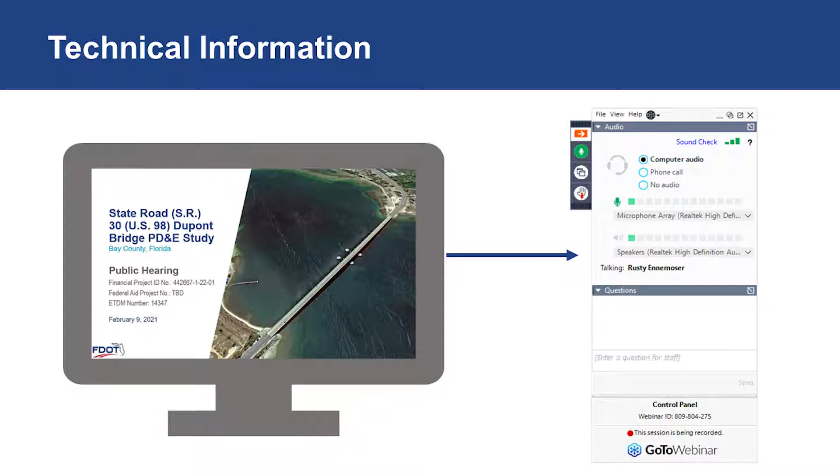All virtual and phone-in attendees will be placed in listen-only mode throughout the public hearing. At a later date, we will provide responses to written comments that were submitted during online registration and those submitted at the in-person venue. The comment period begins as soon as the presentation has ended. Verbal comments from the in-person meeting will be addressed first. Verbal comment requests submitted during online registration will be addressed second.

Providing verbal comments using GoToWebinar is simple. First, you must request to speak when registering to attend. During the comment period, the organizer will call your name that you provided at registration and unmute you. If the microphone icon is green, you are ready to make your comment. If the microphone icon is orange, you will need to click the microphone icon once and it will notify you that you are unmuted, and then you can provide your comment. Again, you will not be on camera at any time if you join online.

During the public comment period after the formal presentation, in-person participants will be called upon to speak first, followed by the virtual online speakers who wish to speak. If you dialed into the public hearing by telephone, your phone was automatically placed in listen-only mode and will remain in listen-only mode throughout the public hearing.

A recording of the webinar will be available at the project website 3 days after the hearing. You can also call the project manager after the public hearing to request additional project information. Prior to the public hearing, draft engineering and environmental documents were made available for public review at Parker Public Library since January 19, 2021, and will continue to be available through February 19, 2021. The documents are also available on the project website. You may also view project documents tonight at the in-person public hearing.

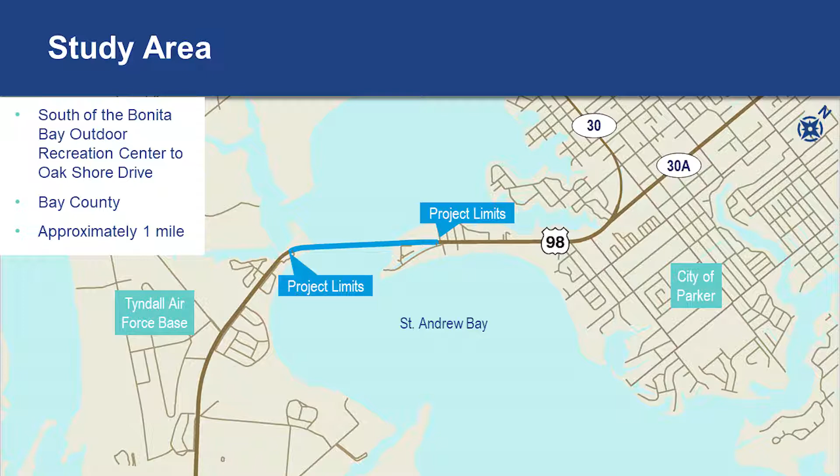The study limits extend from south of the Bonita Bay Outdoor Recreation Center to Oak Shore Drive, a distance of approximately 1 mile. The southern approach is located on Tyndall Air Force Base, and the northern approach is located within the city of Parker.

The project purpose is to identify the best solution and location for the replacement of the existing Dupont Bridge and to secure the necessary environmental and regulatory approvals.

The project is needed because the existing bridge is structurally deficient. It is also functionally obsolete, which means it does not meet current design standards. The existing bridge has a vertical clearance of 50 feet, but the current U.S. Coast Guard requires a minimum clearance of 65 feet. The existing bridge is also not ADA compliant and does not provide appropriate pedestrian and bicycle accommodations.

The project is consistent with local transportation plans, including the Bay County Transportation Planning Organization 2040 Long Range Transportation Plan, the Transportation Improvement Program, or TIP, the State TIP, or STIP, and other regional plans.

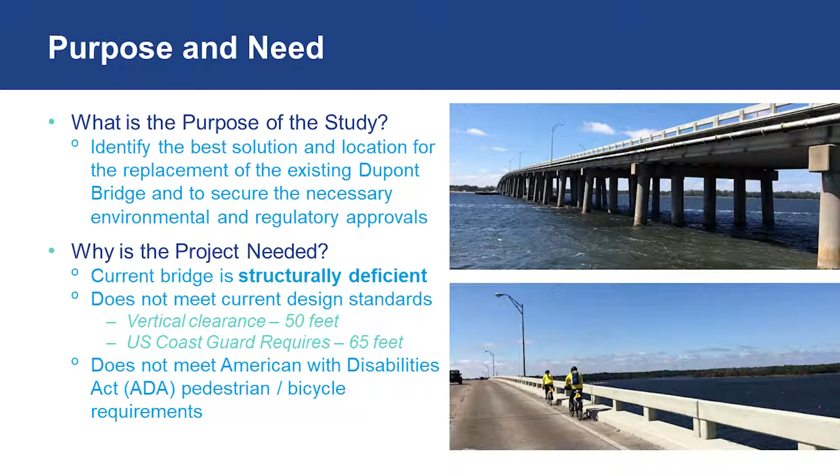3 build alternatives and a no-build alternative were evaluated as part of this PD&E study to meet the project purpose and need, as well as minimize impacts to the natural and built environment within the study area. The no-build alternative assumes no improvements are made and does not meet the purpose and need for the project. However, it does provide a baseline condition against which to compare and measure the effects of the build alternatives. A detailed comparison of the build alternatives is provided in the preliminary engineering report and the environmental document.

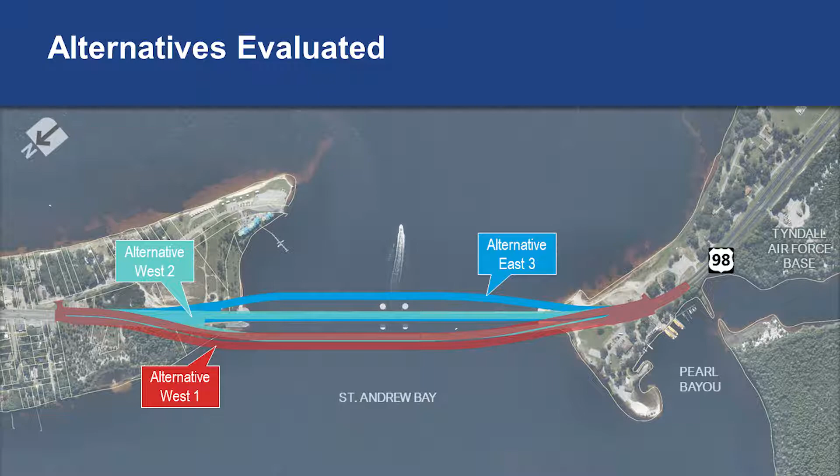Alternative West 1 places twin bridges west of the existing Dupont Bridge, which simplifies construction and avoids the 1920s bridge footprint and the current Dupont Bridge footprint.

Alternative West 2 places one of the twin bridges west of the existing Dupont Bridge. Temporarily, all traffic will be shifted to the new bridge while the existing bridge is demolished. Then, the second twin bridge will be constructed and traffic will open on both bridges. This alternative avoids the 1920s bridge footprint but will have pier conflicts with the current bridge.

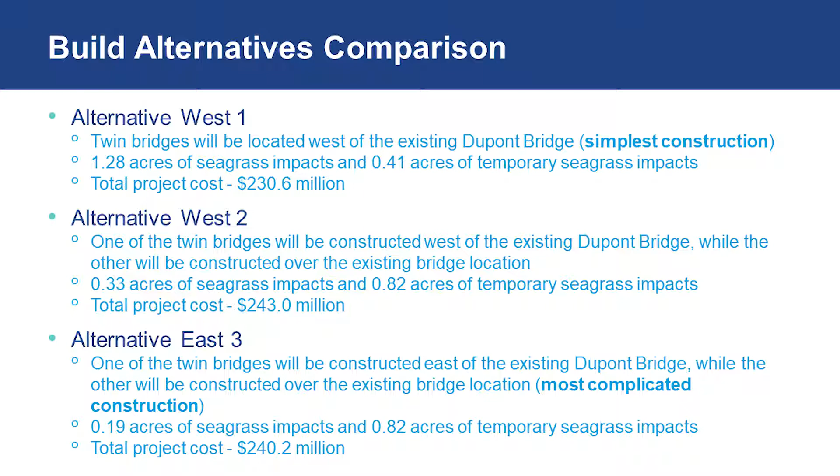Alternative East 3 constructs one of the twin bridges east of the existing Dupont Bridge, then shifts all traffic to the new bridge and demolishes and reconstructs the second twin bridge in place of the existing bridge. This alternative has conflicts with both the 1920s bridge and the current Dupont Bridge footprint.

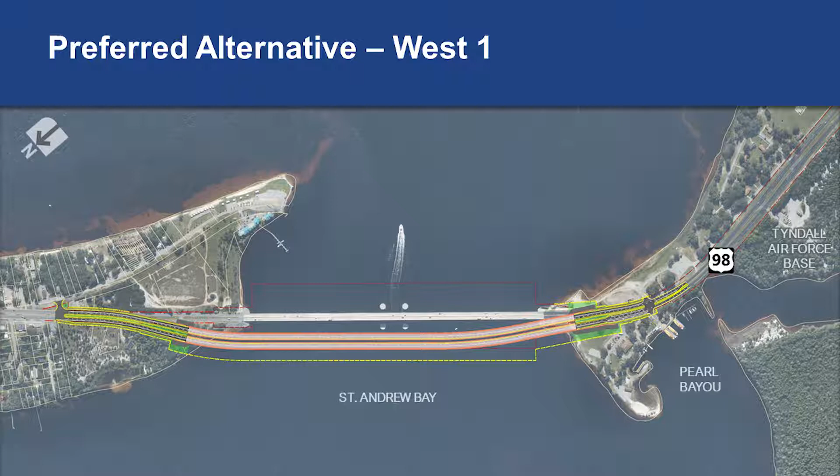With consideration of public input and an evaluation of engineering and environmental considerations, the preferred alternative is the West 1 alternative.

The proposed roadway typical section provides 2 travel lanes in each direction with space to add a future lane. The travel lanes have a 30-foot separation, including 6.5-foot inside shoulders and a 17-foot median with curb and gutter. A 6.5-foot buffered bicycle lane is adjacent to each outside lane, separated from the 6-foot sidewalk by curb and gutter and an 8-foot grass strip. The design speed of the proposed roadway typical section is 50 miles per hour.

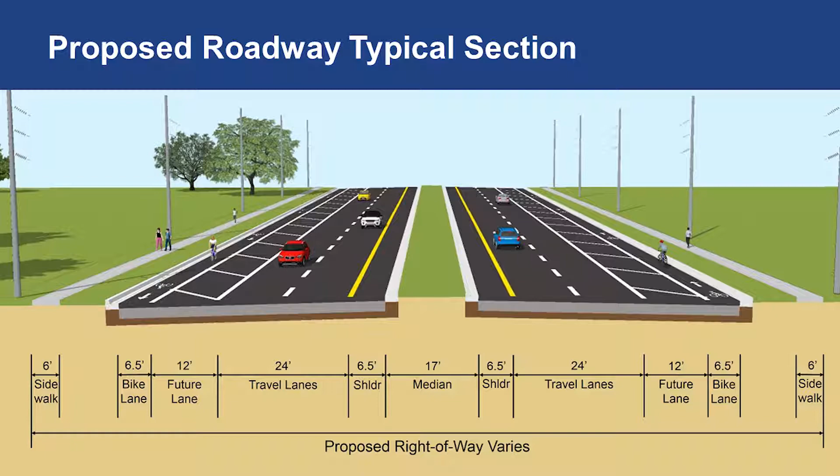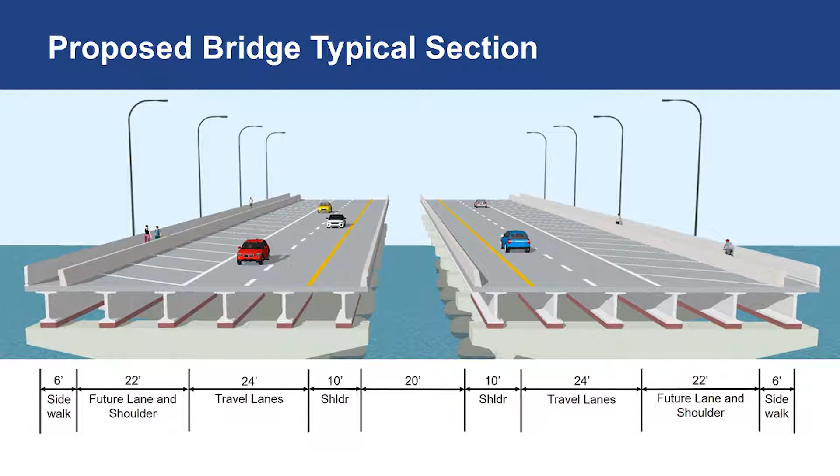The proposed bridge typical section features 2 structures, one for each travel direction. Each structure includes 2 lanes and 10-foot shoulders, as well as room to accommodate a 3rd lane when traffic warrants. The proposed bridges are separated by 20 feet. A barrier wall separates the 6-foot sidewalk from the bridge shoulder. The design speed of the proposed bridge typical section is 50 miles per hour.

The total cost for the preferred alternative is approximately $230.6 million, and includes the cost for construction, right-of-way, engineering, construction engineering and inspection, and wetland mitigation.

This project will not cause any relocation of families or businesses. All right-of-way acquisition will be conducted in accordance with Florida Statute 339, Section 9, and the Federal Uniform Relocation Assistance and Real Property Acquisition Policies Act of 1970, commonly known as the Uniform Act. The right-of-way specialists supervising this program are here tonight and will be happy to answer your questions.

Access management is used to determine the locations of driveway connections, median openings, and traffic signals to improve safety and traffic flow. Proposed access management modifications are on display tonight. The project will not affect the access management classification, Class 5. There are 2 median openings within the project limits, located over 1 mile apart, that meet the access management criteria.

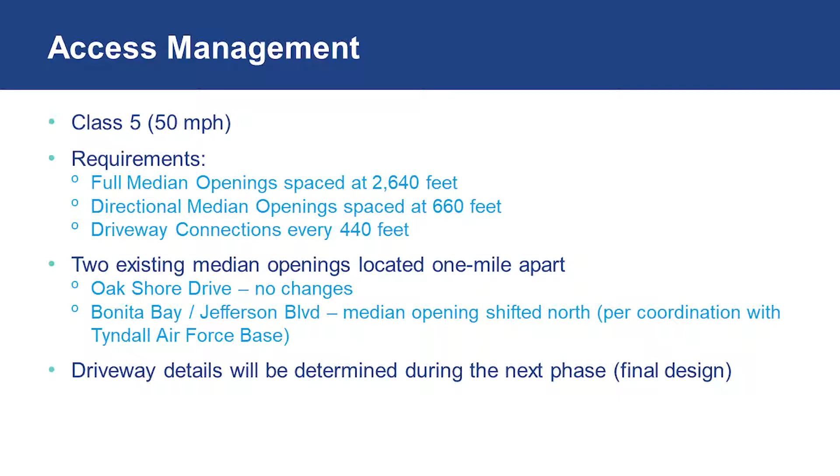The northern median opening, Oak Shore Drive, will not be impacted. Based on coordination with Tyndall Air Force Base, the Bonita Bay Outdoor Recreation Center and Jefferson Boulevard intersection will be shifted slightly to the north, closer to the bridge, but still meeting the median opening spacing criteria. If you have a concern regarding the access to your parcel, please provide your comments.

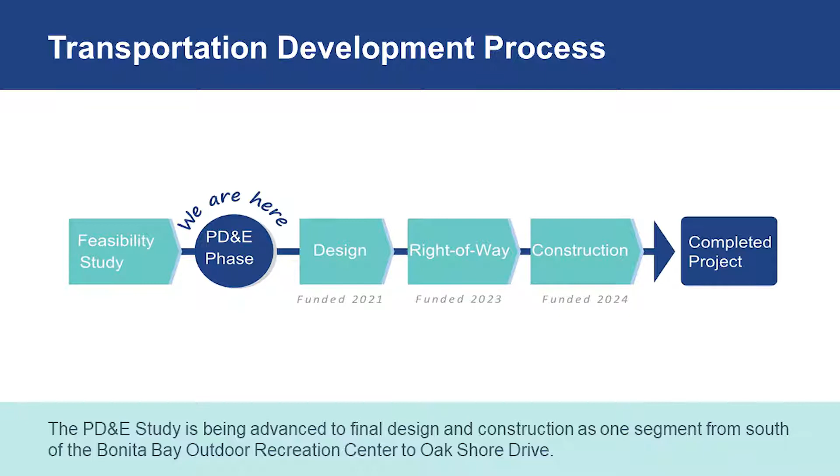FDOT is conducting a Project Development and Environment, or PD&E, study for this project. This graphic represents the delivery process for a project, beginning with the feasibility phase and ending with the construction phase. This project is fully funded with construction funding in 2024.